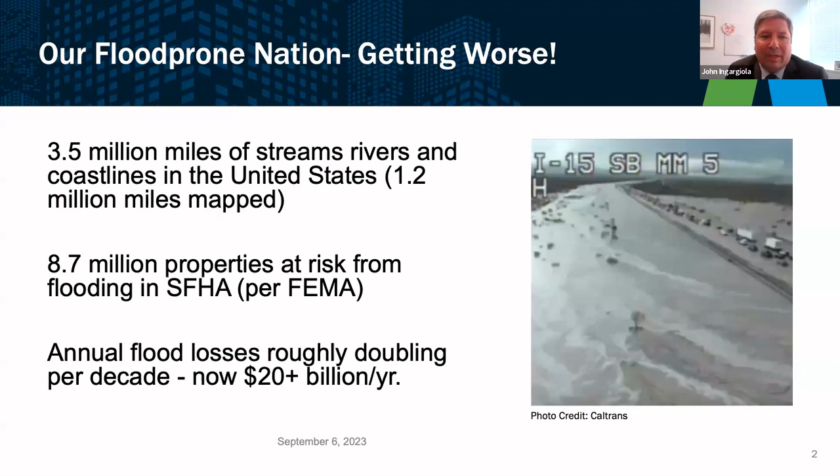But we're having an expanded understanding of flood risk, right? And it's not just what FEMA's data is showing. How many of you, looking for a property on Zillow or other platform, all of a sudden you've got a depiction of flood risk? That's amazing, right? But I read 8 million here - First Street is saying there's 17 million. Once you start to look at non-mapped areas and pluvial areas, this is startling: precipitation models showing that the 1-in-100-year flooding can now be expected every 8 years in some areas. That's truly startling. So what are we going to do about that?

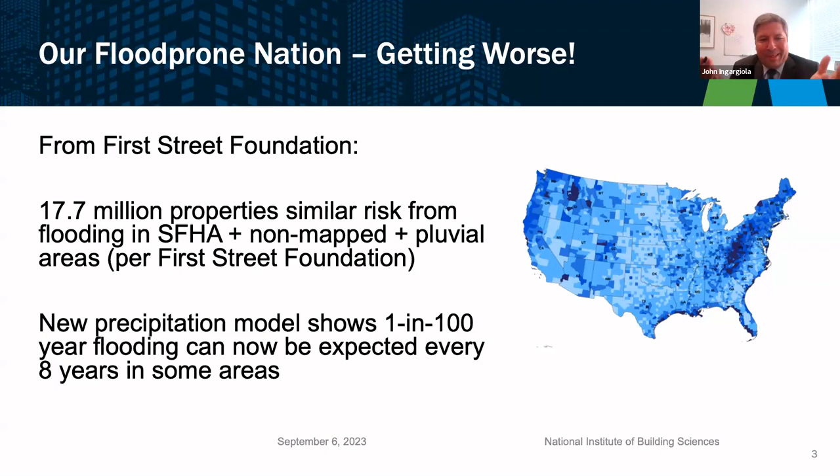Also changing attitudes towards this. I read another story looking at research by Zillow, that today the younger generation, Gen Z and millennials, in addition to looking for a place to live or what type of home, in addition to some of the architectural or ornamental features, they're asking the questions: is this community going to flood? Is my house going to flood? Am I going to be at risk to some climate disaster? So that's the sentiment of the younger generation, and I think together we need to tap into that, and with a little bit of awareness and education, please help spread the word, here and beyond. Maybe we can have a greater acceptance and implementation of these new flood standards.

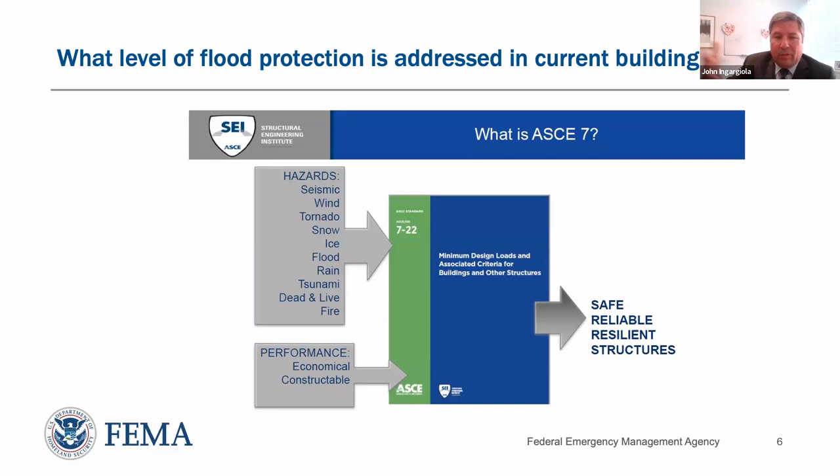Next slide. Really the Bible for a lot of this is the building standard, the consensus building standard from the American Society of Civil Engineers, in particular ASCE 7-22, design loads. That informs the construction design and construction provisions related to seismic, wind, tornado - you see the hazards here, including flood. That standard, as it's developed and in cycle every 6 years, has to go through a rigorous process, a truly fair, open, and balanced process. I'm not sure everybody knows that or appreciates that. It's done by volunteers, and through that balanced process, you have producers, regulators, consumers - definitely a practitioners, definitely a cross section of the stakeholders that are involved. It always has to put through that lens: is it technically feasible? Is it constructible? And is it economically feasible? And the outcome is a standard that, when it's incorporated by reference or used otherwise, leads to safe and reliable structures.

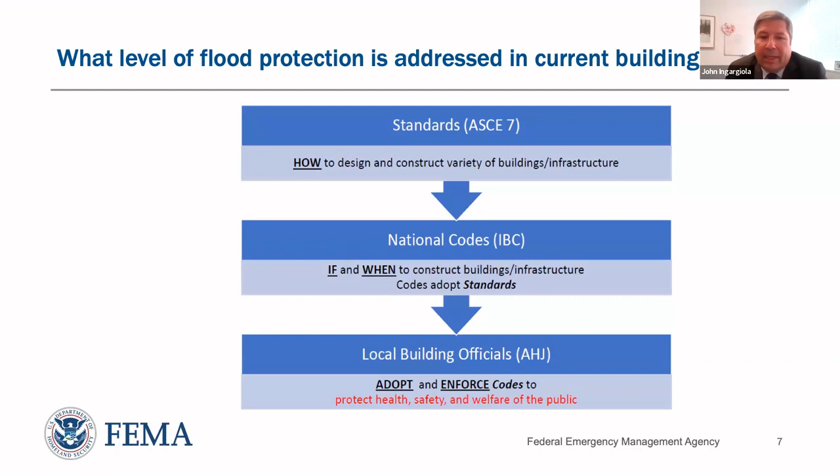It's been a long time since we've seen the latest and greatest, the higher standards in these consensus standards. We have to go back to 2006 when freeboard stopped being a good idea and became a minimum requirement across residential and non-residential buildings. That went a long way. But why did we have freeboard? Wasn't it really a proxy for something more rigorous, a more comprehensive depiction of flood risk and flood hazard?

Due to technology, changing conditions, and other uncertainties, freeboard was a good proxy and easier to implement. But is that freeboard for base flood elevation from 2019 going to be the same 100-year annual exceedance probability in 50 years from now? The flood risk is going to change. You can see that the assumptions, the percent damage, the annual chance of a flood event could increase from 30% to 50% or 60%.

Beyond the life of a mortgage, but more broadly across the life of a structure, that is real dollars and cents. So should we still hold on to that concept? Well, let's use the 100-year hazard basis and then add a foot. Next slide.

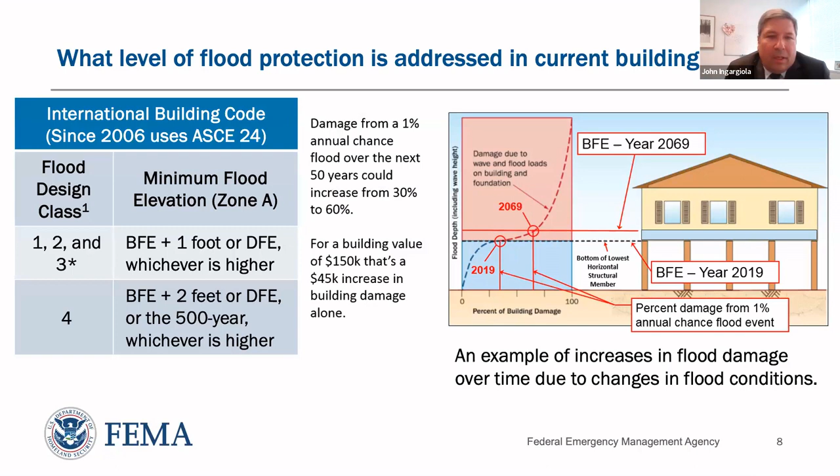I think many in this group have an appreciation for all the benefits of freeboard. It provides varying levels of protection. If I have a very wide, shallow floodplain and impose a foot of freeboard across it, that might give quite a lot of protection, even above the 500-year level. But what about a very narrow, steep floodplain? We impose a foot of freeboard there, but you hardly scratch the surface if you're looking for higher protection.

So really, something more uniform and standardized, if the technology, data, and models support it, is a return period approach. A return period approach provides more consistent protection, and that's actually what other hazards ascribe to and have for many, many years, looking at return periods and recurrence intervals.

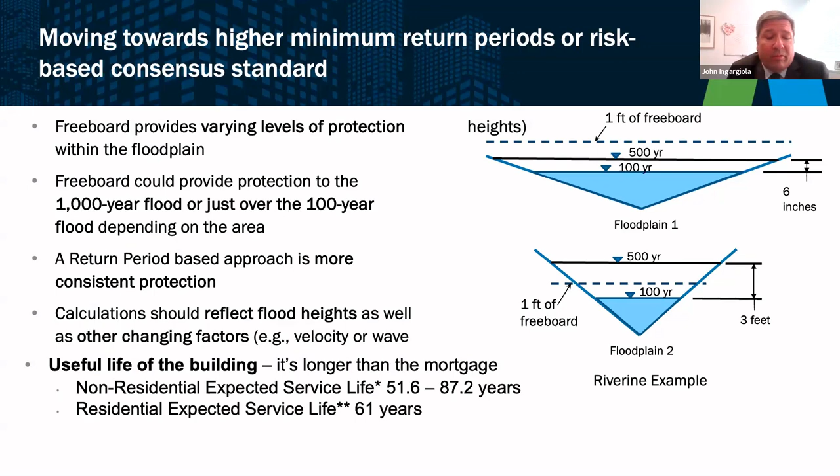As you can imagine, when you're looking at that approach, and if it becomes higher design levels, all of that flows into not just how high, but all that's required to make that structure actually flood resistant, looking at the loads, the resistance, and what to consider in that process. And then, as I mentioned, the realization that our buildings are lasting a lot longer means we need to account for that with any future conditions or minimum standards.

Next slide. Future conditions is a topic many of us are interested in. There's a lot of fantastic work going into that space at state and local levels, among research and government institutions. But it really needs to become the norm versus the models we have now. Understanding and being able to apply the impacts from sea level rise, erosion, increased development, and changes in precipitation - these need to be brought to the forefront and communicated among all our different stakeholder groups, so that whoever the customer, stakeholder, or client is, they understand the significance of it and why it's important to include in future design.

There are so many issues with the current built environment, and tremendous investment to either acquire, buy out, or retrofit. But I maintain that if you look at the census data, which says 1.5 million housing starts every year, and add to that thousands and thousands of non-residential starts, we have to stop building the problem. Otherwise we're just going to keep adding to this inventory.

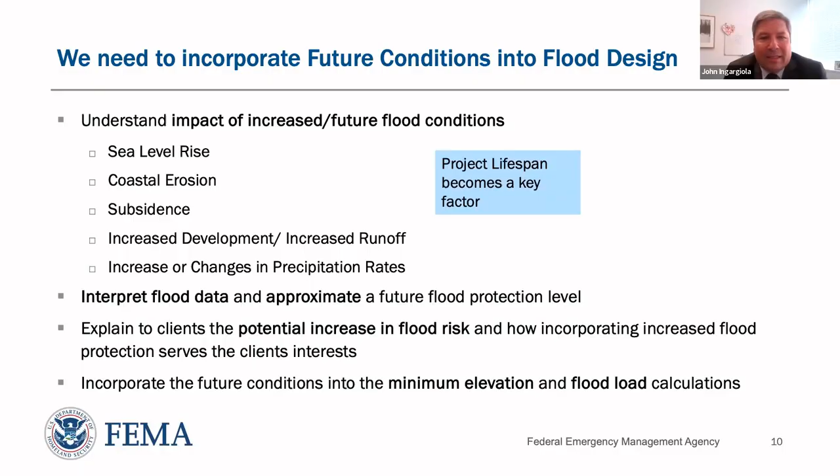Next slide. All right, so why are we here? Why did I gather you together? What just happened? John, tell us what just happened. Okay, next slide. ASCE 7-22 supplement number 2 - it doesn't sound very exciting, but believe me, it is very exciting. Chapter 5 has always addressed flood loads in the consensus standard, and the committee didn't just decide to tweak it or strengthen it or otherwise make minor changes.

They decided to rewrite the whole entire chapter. Why? Because that chapter had for decades been built on the premise that we start with the 100-year hazard basis.

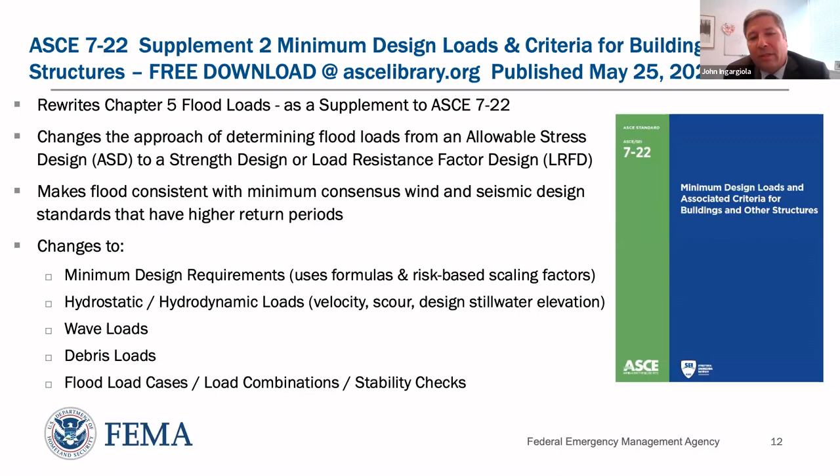We add things like freeboard, coastal A zones and other higher standards, and consider the tide and toll of disasters, the real life experience, and how other hazards are dealt with. This committee of volunteers decided we can't do that anymore, that's a Band-Aid fix. We have to bring flood into the same level of protection and reliability as the seismic standards and the wind standards. To do that, higher return periods have to be employed. When that happens, all of those building blocks, calculation of loads, consideration of combinations, all the things critically important as structures are built and foundations are designed, they have to be reflected in that.

A little bit about the ASCE 7 process. The standard has a 6-year cycle, and it's comprised of volunteers that for that 6 years work on updating the standard.

They come from all walks of life, practitioners, designers, consumers, other groups, including federal agencies, and you're seeing federal agencies, FEMA included, as committee members on some of these standards committees. So it's important to recognize who makes these standards, and that committee's work has to be voted on by broader committees based on the entire ASCE standard and even the public. All told, the ASCE 7-22 had to involve about 450 volunteers from different disciplines, working diligently for 6 years.

So I put a lot of faith and stock in that, and that resonates with me, and helps answer the question: who makes these standards? Is it a small group of people? Is it open to the public? It is truly open to the public. Just wanted to share that.

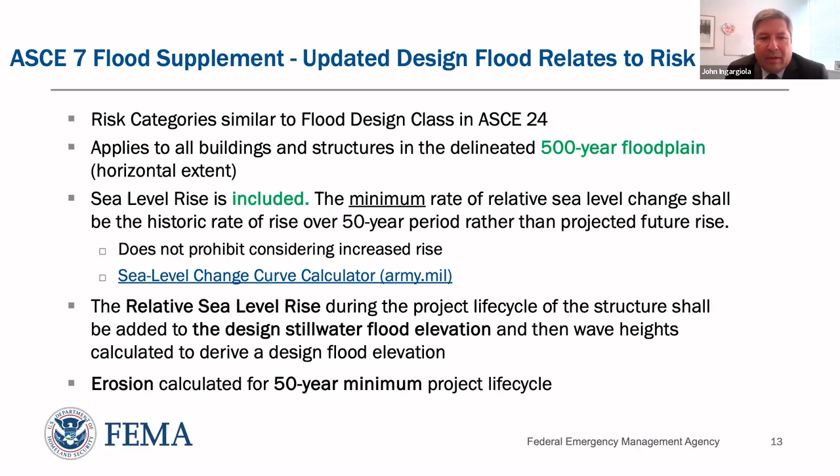So what does this mean in these risk categories? John, what are you talking about? Higher return periods. And John, we don't have maps that represent the 750-year mean recurrence interval. What are you talking about, John?

So the ASCE committee explored what is available across the landscape of federal agencies, the Corps of Engineers, FEMA, NOAA, USGS, where flood studies have been done in a comprehensive way, using models where the estimated MRIs could be calculated even if all you're starting with is the 100-year data set.

So that's what you see here, risk categories 1 through 4. Risk category 1 is small, temporary structures. Risk category 2 is most everything you're familiar with, including your home, business, and commercial. Risk category 3 gets into higher assembly-type occupancies and medical facilities, and risk category 4 is essential and critical facilities. So for all intents and purposes, 500-year is the new MRI.

What you see here is the scaling factors, and there's an equation at the bottom. Engineers don't like doing equations, but it's important enough that the standard and the committee said we can't wait. We think maps and data are coming in the future, but we're going to provide this equation and these scaling factors, document the source in the commentary, and this is how we're going to estimate from the 100-year to the 500, 750, and 1,000-year occurrence intervals.

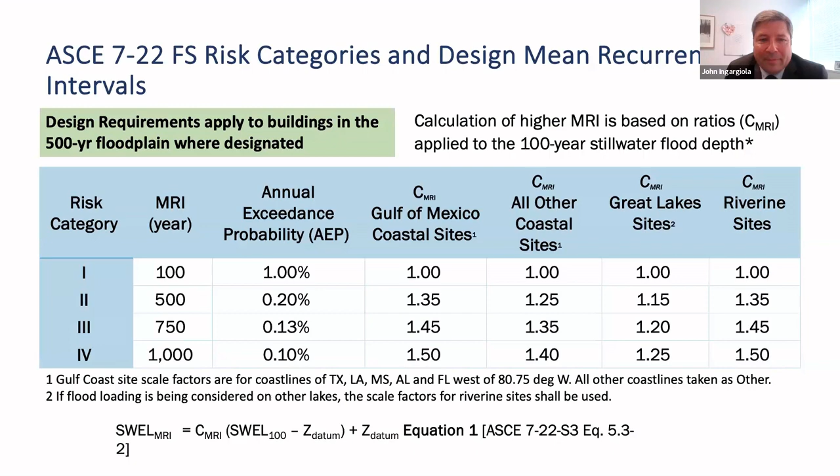This is a depiction, as I said before, of all the considerations that have to be taken into account—not just getting to the right elevation. You need still water flood depth, an estimate of the eroded ground surface, and the delta of sea level rise. All of that is critical to calculations of hydrostatic, hydrodynamic, velocity, waves, and debris impacts. So this gives the standard more emphasis on those aspects of appropriate minimum design.

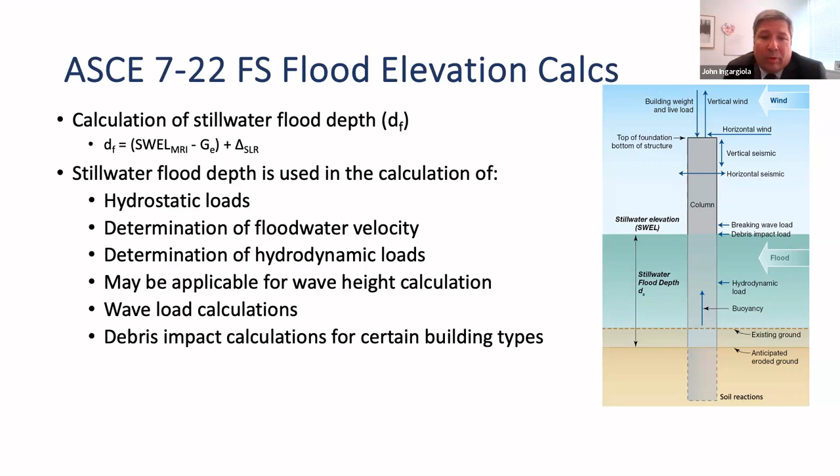Here is a link to the Chapter 5 flood supplement number 2. It is free and available to download or print, so I encourage you to download it, read it, and look at the commentary. The commentary is especially informative—it shows how they arrived at the different decisions in the new standard.

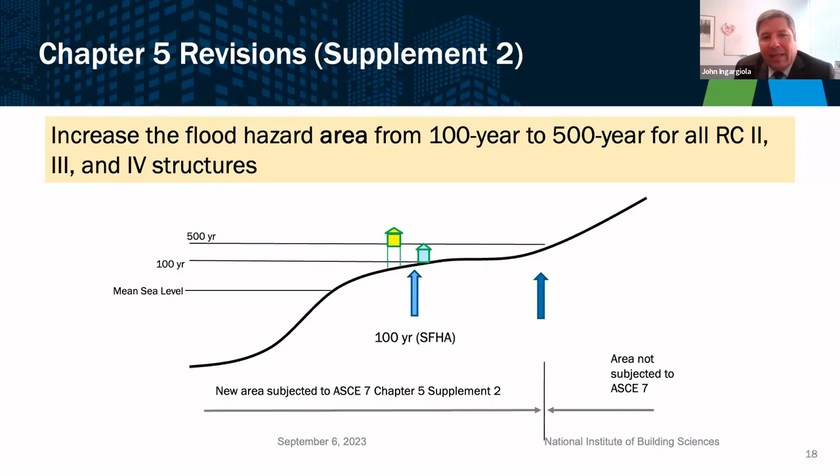So some visuals that we're putting out there—I took some of these slides from my presentation last week with ASFPM and ASCE—starting to show, horizontally, what this means: the flood hazard area is going from 100 year to 500 year.

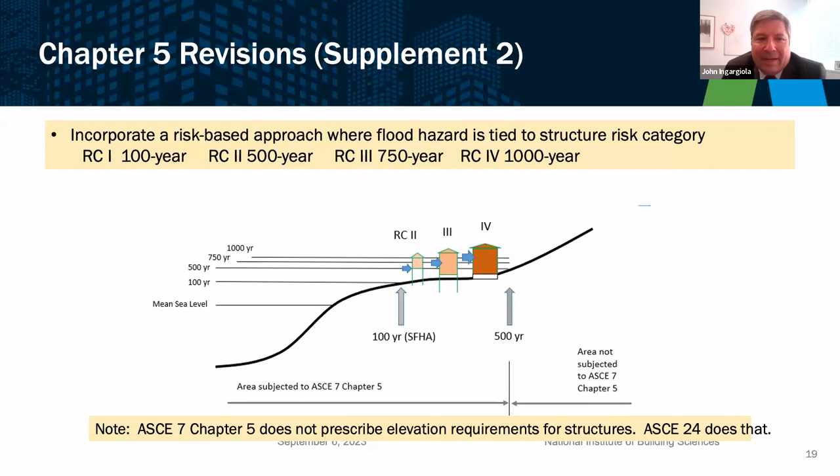And then, as I mentioned, the relative sea level rise at a minimum has to be considered. Next slide.

As I mentioned, we're seeing a growing data set and knowledge base on future conditions and climate change, and some of these studies are showing the trends and increases in sea level rise in many places across the US. Next slide.

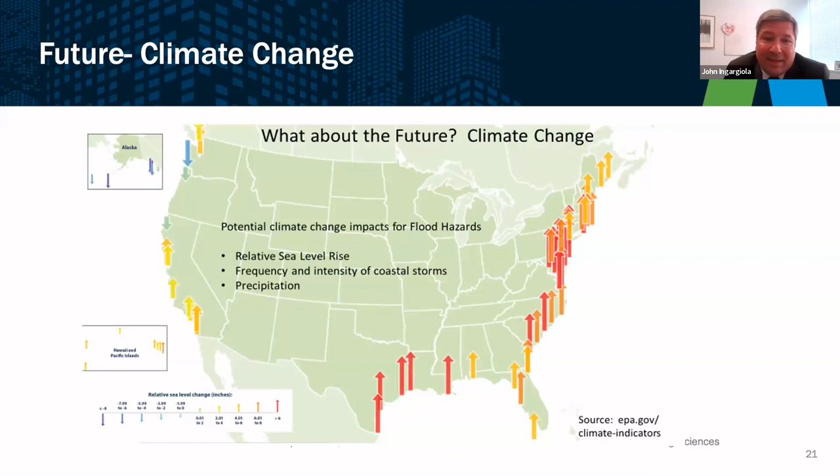So this is just kind of a layout—the big parts of the standard are treatment of the hazard, treatment of the load cases, and the reliability provisions that go along with it. Next slide.

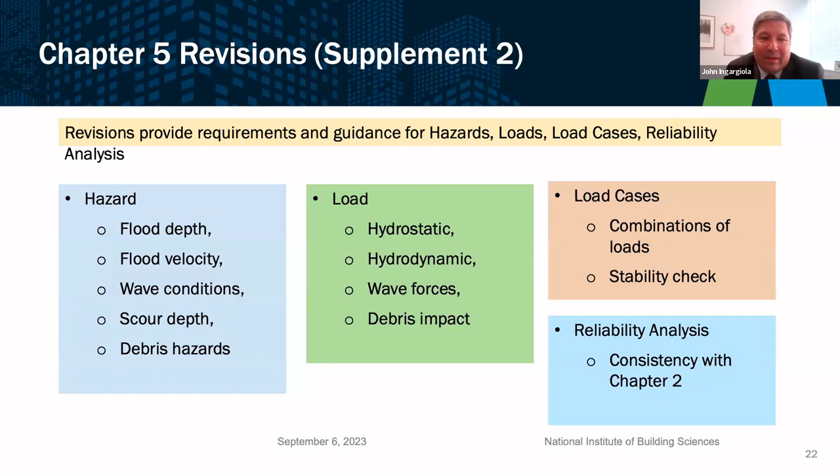Here is sample text from the standard, very clearly establishing that for risk categories 2, 3, and 4, the flood hazard area is the 500-year floodplain, and for risk category 1 it is what we know as the 100-year floodplain. Next slide.

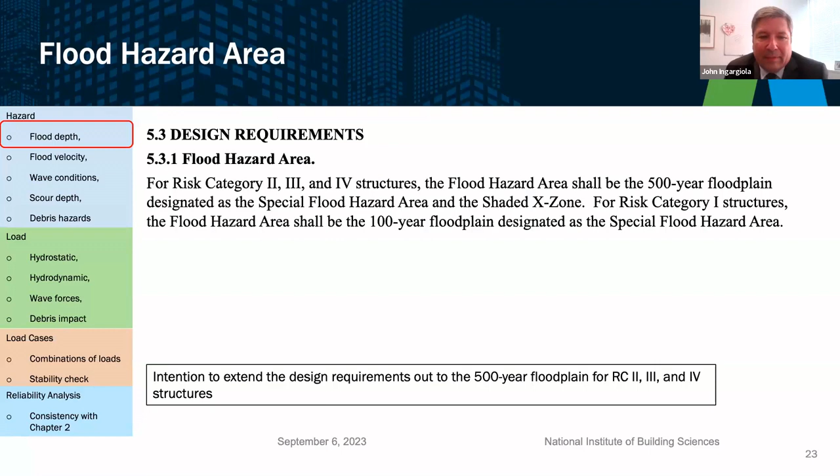Again, these provisions are right out of the standard, as well as the informative charts and graphs, showing the distinction between still water and design still water, what makes up the design still water, and how it has to be applied through the load standard. Next slide.

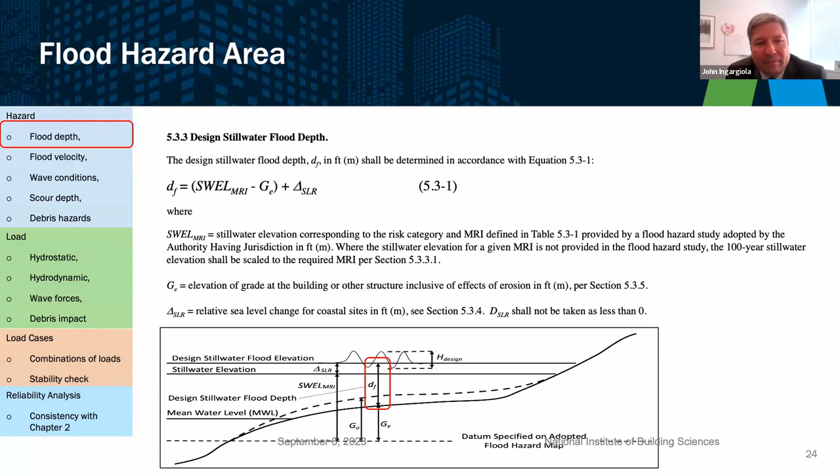There again is another representation of that chart, the risk category. Here's language excerpted directly from the standard—that equation explaining what those terms are and the data to provide. The intention is to fill that gap until we get more robust, comprehensive flood maps and data to be able to point and click to pull up all the needed data. Next slide.

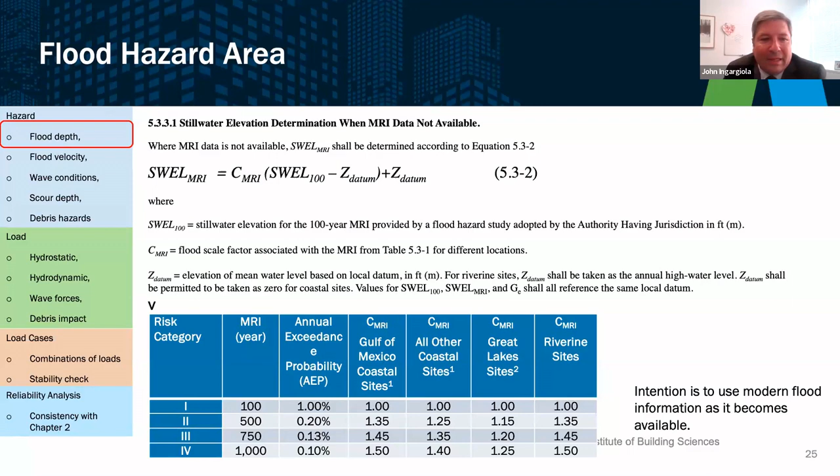There's language on the sea level rise aspect that has to be considered for the 50-year period, pointing out the distinction between historic versus climate projections. Remember, a lot of this got decided 6 or 7 years ago, but it's definitely a step in the right direction. Next slide.

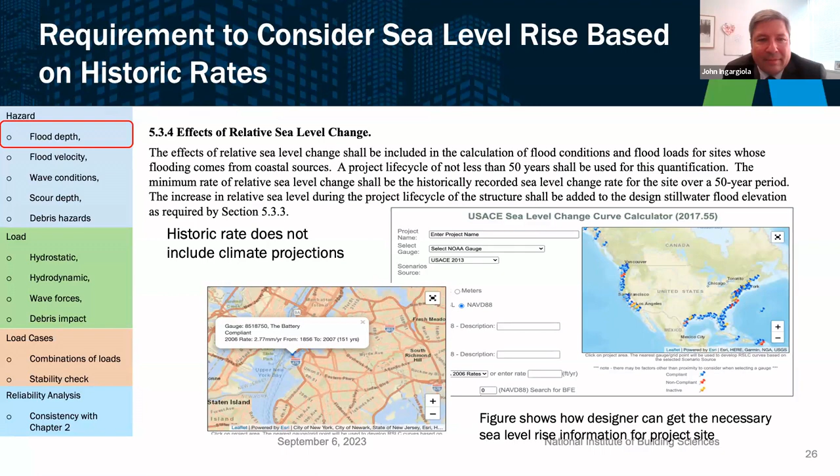Okay, flood load cases—how do you consider moving water, hydrostatic water, waves? Just giving you excerpts directly from the standard. Next.

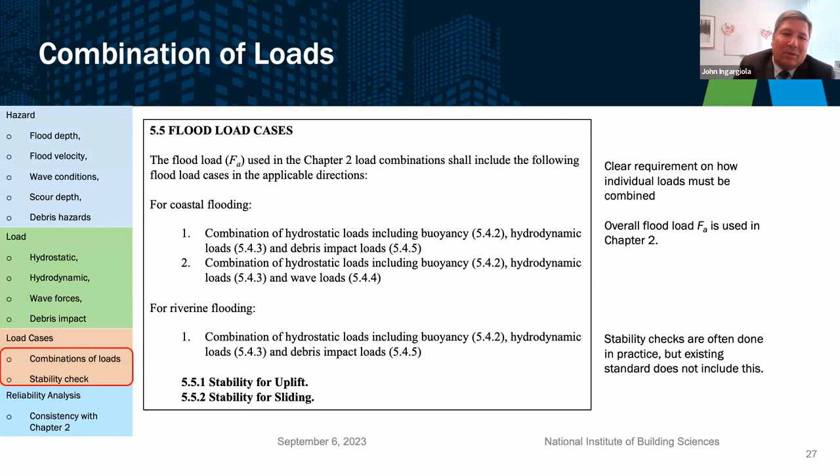Okay, I think I've covered the highlights here. In summary, we're turning the corner on the 100-year hazard basis. We're not using that except for small and temporary structures, and we're embracing new higher mean recurrence intervals, sea level rise, and an expanded floodplain.

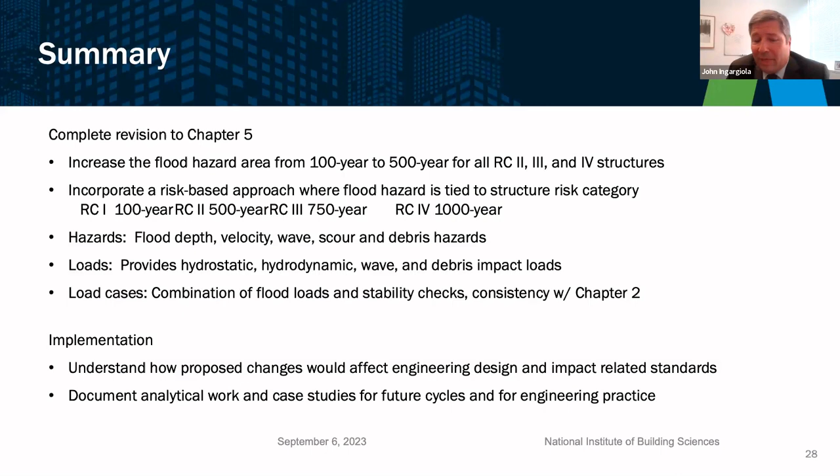This committee's work finished for the supplement, but they just started on ASCE 7-28. There's a Chapter 5 flood committee, and they're going to review what the past committee did, what the documentation and analytical work were, and what they weren't able to achieve in that cycle - maybe climate informed sea level rise models. That might emerge in the next standard. Their work just started, and they'll be at it for the next couple of years.

As I mentioned before, ASCE 7 has the loading criteria, and then 24 helps translate that into things like elevation, into prescriptive requirements for openings, flood resistant materials, and floodproofing. So the two work in tandem and together.

So what do we do from here? This is a timeline showing the model codes we have, predominantly the International Building Code. The 2024 edition is about to come out in a few months, then every three years after - 2027, 2030. As the consensus standards develop in their cycles, they are proposed to be incorporated into those model codes.

The IBC 2024 is intended to incorporate by reference ASCE 7-22. However, the flood standard did not get finished in time to rewrite the flood provisions. It took another year because it was so groundbreaking, so new, and also contentious - let's be honest, a big departure, a big new normal, a big change in minimum standard. So it missed the deadline for 2024, but it's being prepared for incorporation in 2027.

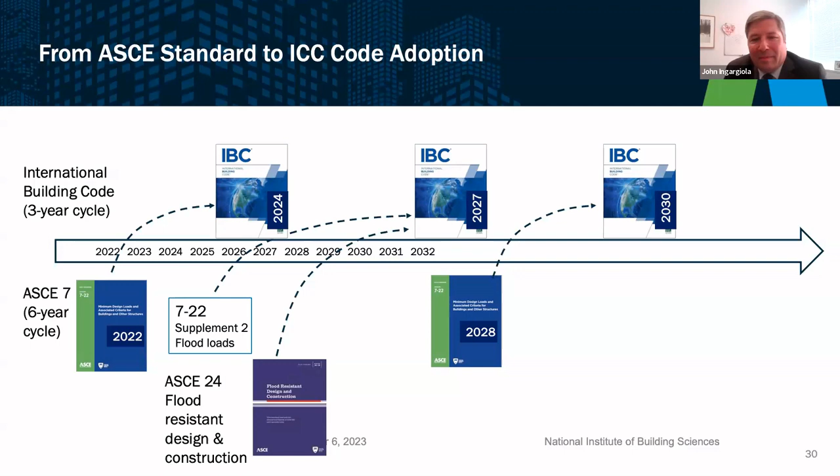It doesn't have to follow that model exclusively. If your community wants to take advantage of the new standard now, it is written in mandatory language and can be considered either in the prevailing building codes or even floodplain management ordinances. I showed here 2028 and 2030 - I'll get to that, there's a nice surprise coming up.

FEMA's role in this space, as you've heard me talk about before, is learning from disasters, applying that knowledge, filling in gaps, doing best practices little by little, and helping to inform our minimum codes and standards - and that cycle continues, taking shape across the various programs.

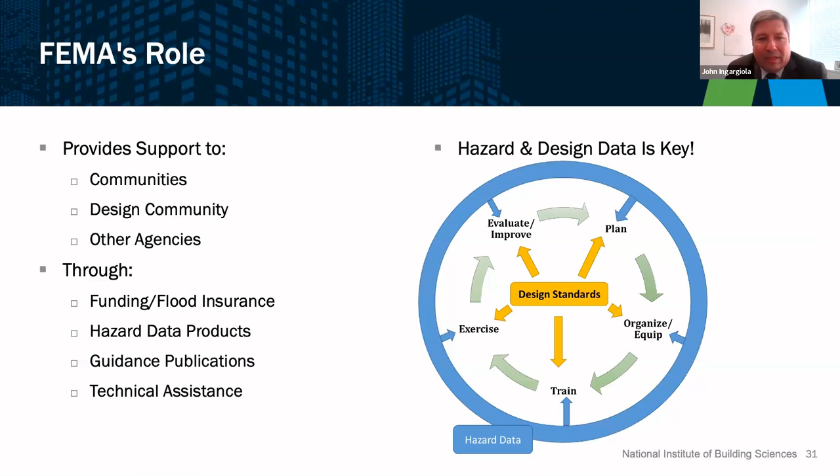I don't want to dismiss the role of other agencies. As I mentioned, the ASCE 7 flood supplement would not have been possible without the extensive studies from the Army Corps of Engineers, which contribute to the calculation of these loading factors, these scaling factors to approximate the higher MRIs. There's also research, data, and studies from USGS, NIST, NOAA, and FEMA. So it very much embraces the variety of stakeholders and users of these consensus standards, and the federal government takes an active role.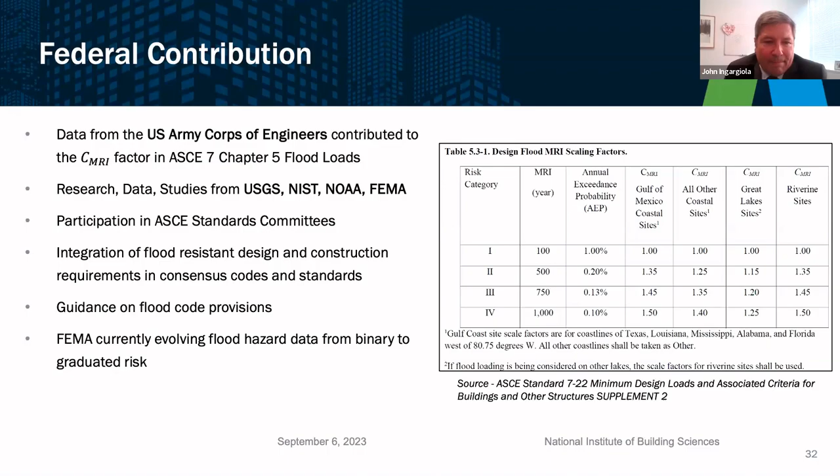The exciting part for me - if you haven't been exposed to it yet, I'm one of those engineers who needs better maps and data if you want me to use these new flood standards. So let's take a peek there.

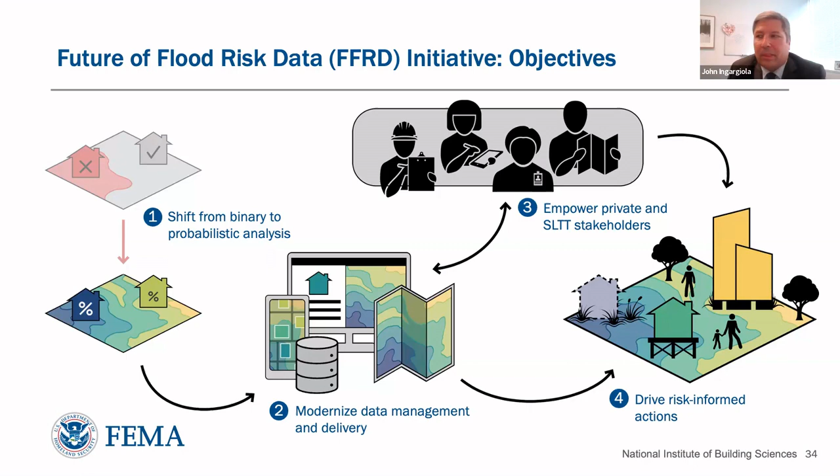The future of flood risk data is really well described in this graphic - going from the binary depiction of flood risk to more of a probabilistic analysis. To do that, we're embracing and harnessing technology advancements, data management, and ways to deliver that, serving it to all of you and various stakeholders for the variety of needs to manage development, consider flood risks, and employ flood risk reduction. The outcome is a better, more risk-informed approach to flood risk reduction.

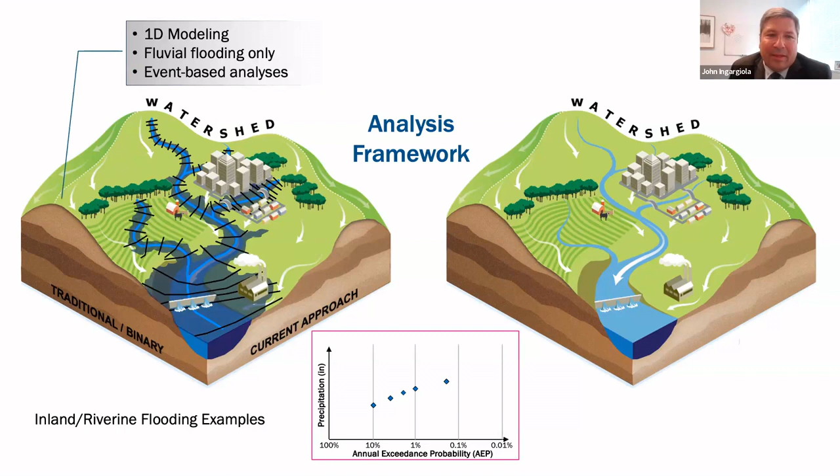Another great visual embracing that technology space - moving away from 1D modeling and its limitations, to embrace full watershed, full depiction of flood risk, the pluvial contribution, 2D modeling, and what you're able to get out of that with improved precipitation, modeling, and more robust data, including plotting curves and looking at confidence levels for exceedance and precipitation, just one byproduct of that.

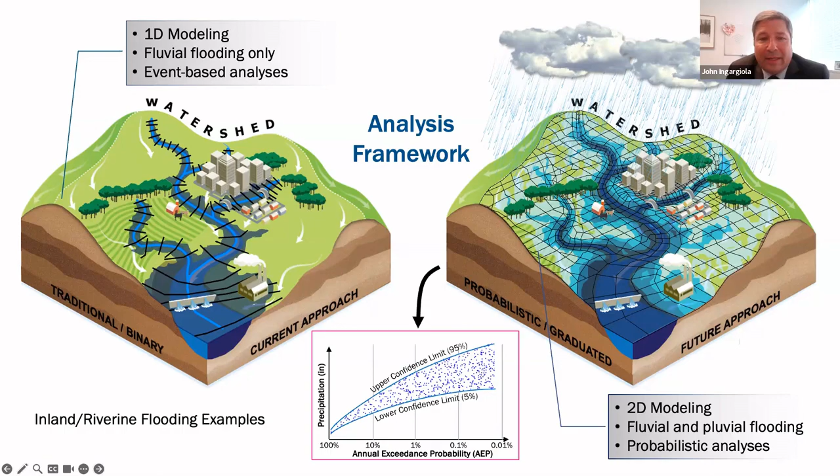Let's look also now at the digital space, at what we traditionally know and use in the regulatory framework, and how that's changing.

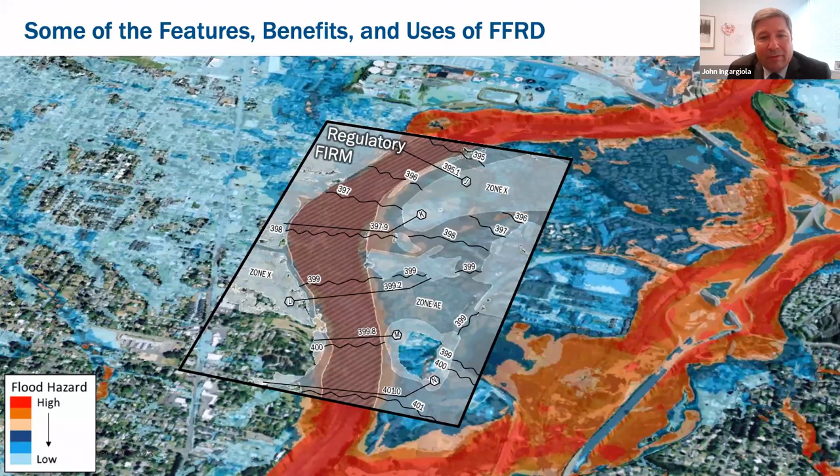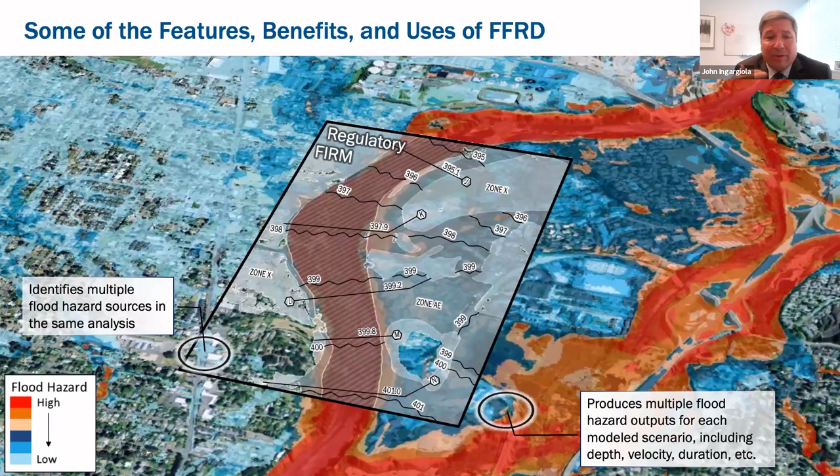We're going to be able to look at multiple flood hazard sources in the same analysis, and start to do comparisons with different outputs, different modeled scenarios, different depth, velocity, duration. Just look at the power coming out of the future flood risk data, with different scenarios and probabilities, from frequent to extreme.

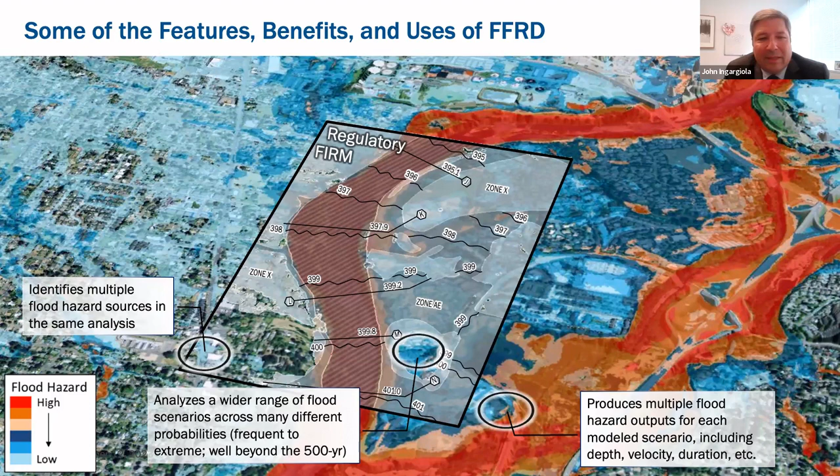This is exciting for me - connecting back to the codes and standards, having two locations and pulling up the hazard data on sites of interest to look at credible evaluations. Just imagine being able to pull up or have available flood hazard curves at these locations.

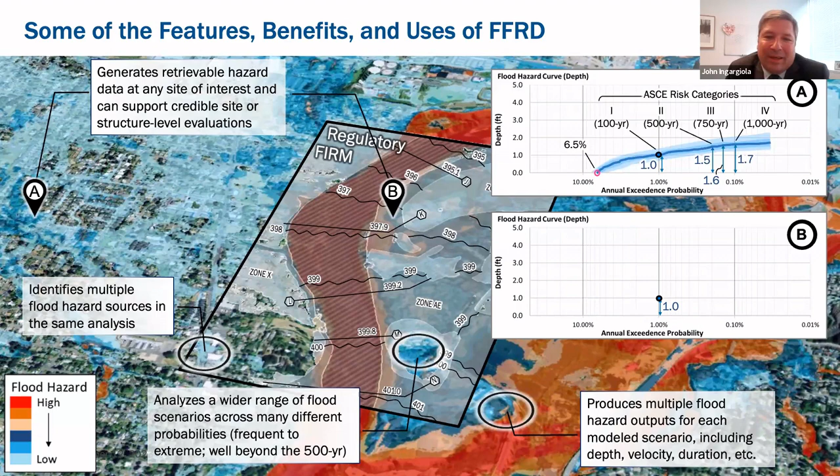At the first click, these two locations at the 1% annual exceedance probability line up pretty similarly - there's a 1 foot depth. But let's look what happens to the hazard curve. Let's plot the one for B. Oh my gosh, look what just happened.

As we consider risk-based, risk-informed approaches depending on the type of structure, its use, occupancy, importance, and category levels - it's not just residential or non-residential - look how that hazard curve changes at site B. This is very dramatic. This kind of information could not be produced previously, but this is what is very promising about the future flood risk data.

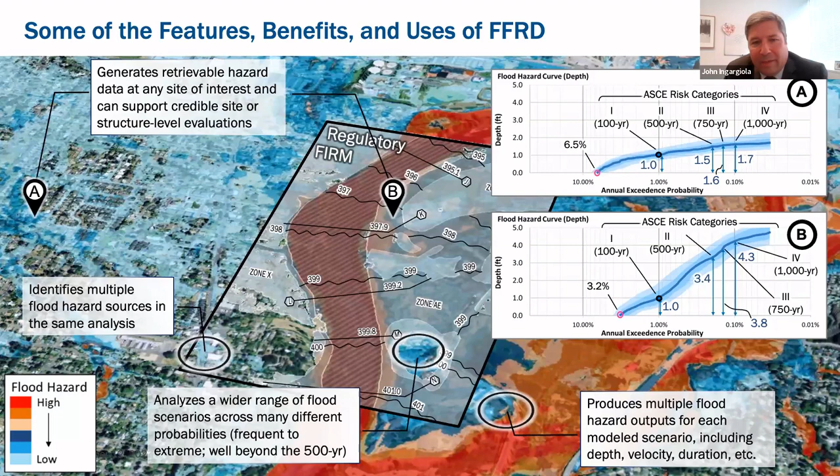Other visual product comparisons - this is another draft from their prototypes. I think this is a coastal setting where storm surge elevation is modeled, and it's relatively consistent, but once you try to model the difference in the waves, you see a dramatic difference as you plot these curves on the different wave heights.

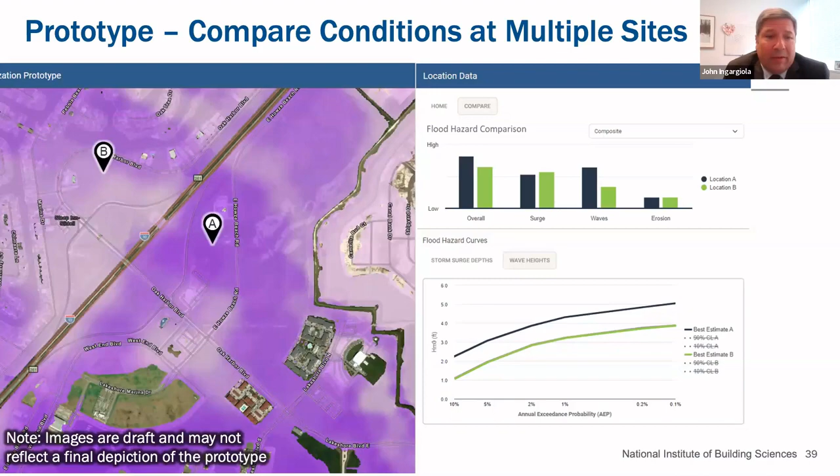So what else is FEMA doing in this space? As the standard is published now, we want communities to be aware of it, to learn about it, to consider using it. Often FEMA will fill the gap and provide design guidance, so look for a designer's guide to using ASCE 7-22 supplement coming out this fall.

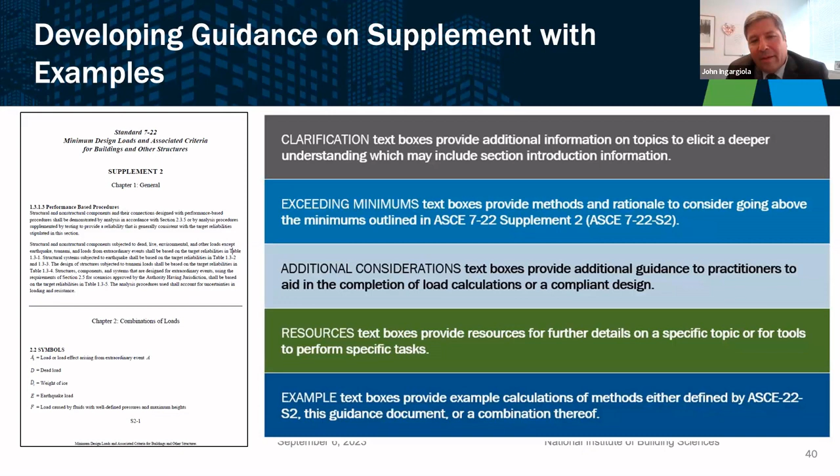It's going to give you the soup to nuts - first starting in a regulatory framework, here's the current set of parameters in the floodplain, here's what's new in the minimum load standard, and here's how you would apply that in your community.

So what does the future look like? Beyond just sea level rise, the next edition, ASCE 7-28, will have an entirely new chapter called Future Conditions. This has never been done before, because until now everything - loads, probabilities, recurrence intervals - were based on historical data. But the Future Conditions chapter will be based on future conditions, climate loads and climate scenarios, addressing flood, snow, rain, ice, and wind, and providing mandatory language if chosen to apply.

in jurisdictions that adopt it. There's a really good link to a description of all these resilient standards and manuals of practice that have come out from ASCE, describing them and their relevance - pathways to resilient communities.

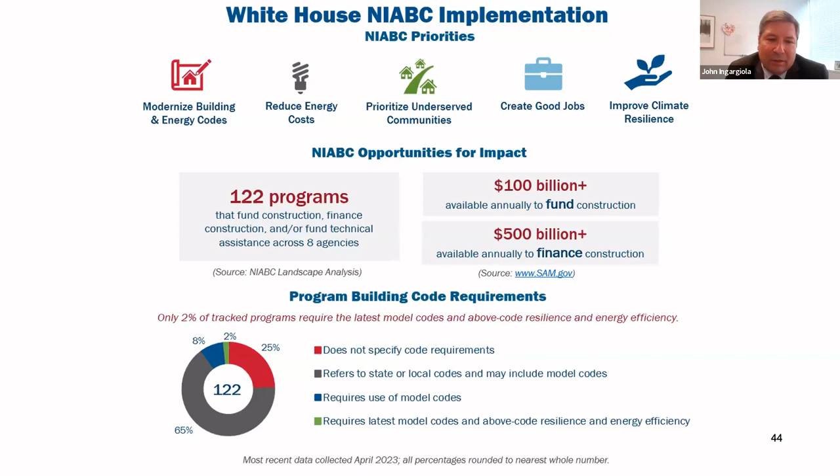And why does that make a difference? You've heard me and Leslie from FLASH tell the story here. All of these codes and standards are great, but if they sit on the shelf, they don't do much good, right? So we really need to change that needle. We need to partner and equip anyone who wants to work with us, including all of you.

So trying to get to those areas, looking at the new initiatives and government programs, direct technical assistance, CDRZs. There's a lot of new initiatives that can be advanced. Next slide. A lot of words here, but just to tell you, the national initiative had their 1-year anniversary.